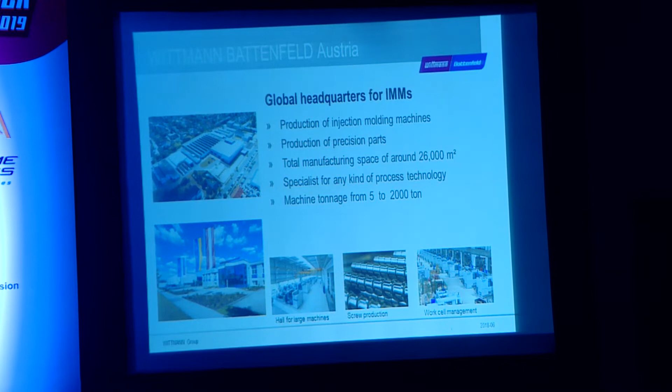Technology and innovation on factory automation. Today, technology is the most wanted for automation, being the most reliable source for high productivity and increasing turnover.

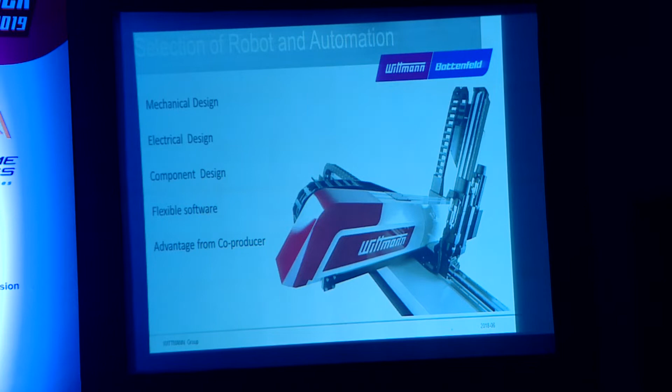The major thing I want to talk about is the selection of robots and automation. What are the critical points we need to consider when selecting robots? The main ones are mechanical design, electrical design, component design, flexibility in software, and the advantage of how it's going to help the co-producers.

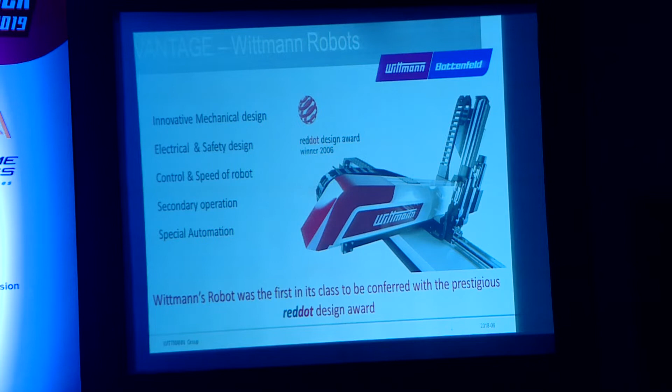So how is it going to help us? Wittmann was the first company to win the Red Dot Design Award for this in 2006, for robot designing, based on the mechanical, electrical, and safety design.

About the mechanical design in general: we have a stable design with a kickback stroke, and the drive is independent of the length, using high dynamic motors and gearboxes. Mainly, we use linear bearings.

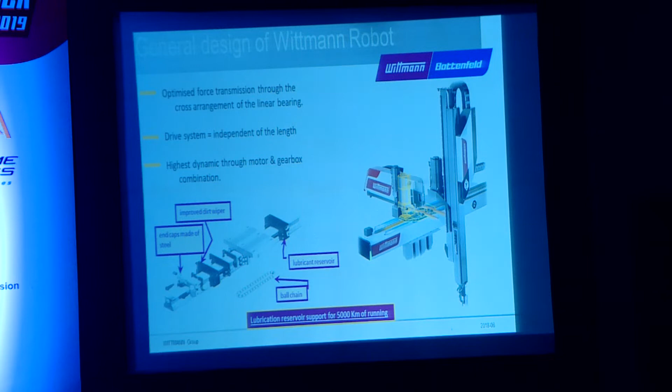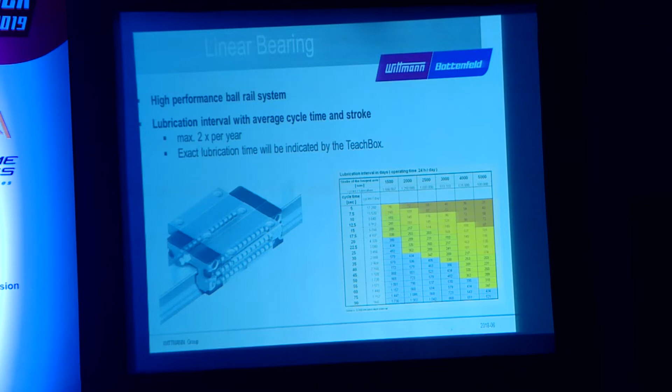All these linear bearings support 5,000 km of running with inbuilt lubrication, which covers almost 1 year of time. As advice, we ask everybody to lubricate these linear bearings every 6 months.

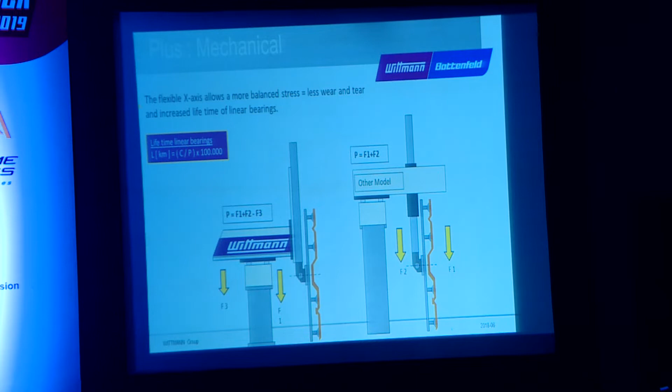Because of the kickback design, we are able to handle long end-of-arm toolings or long components with a short stroke. Due to this, we avoid the cantilever effect, and we have a counterweight on the back side. This helps with a high linear bearing lifetime and mechanical advantages.

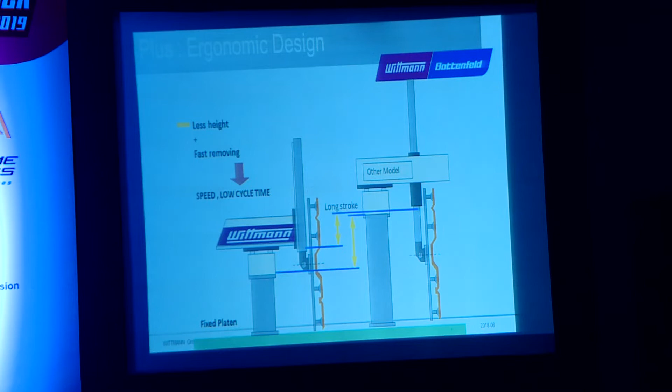Due to this kickback design, the adapter size is low, so we can achieve a low cycle time. Even the cycle time can be reduced with this.

Electrical design: basically, we use CAN bus technology, so all our cords have been divided inside the robot. When you see the electrical cables, there are only very few cables running through the entire robot, since we can control everything with CAN bus.

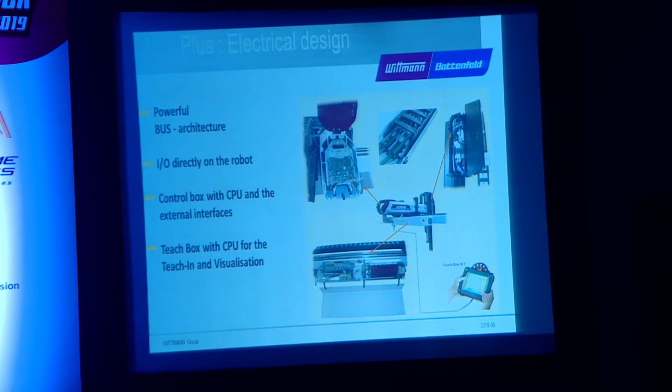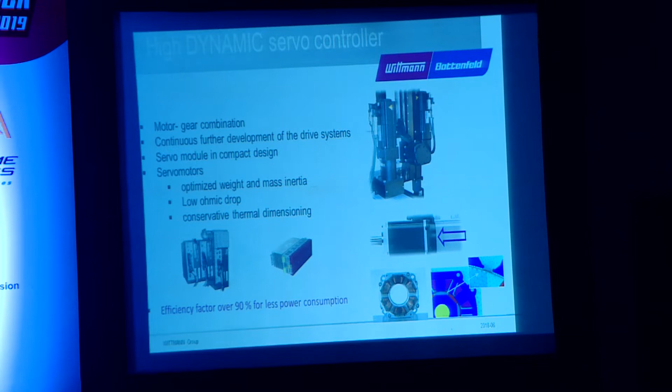High dynamic servo controls: we have been establishing servo control technology for a long time, using 90% efficiency servo drives, with 3 servo drives combined into 1 drive for a power saving mode.

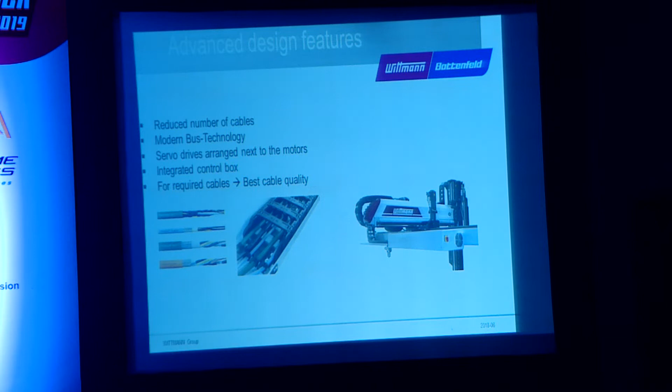As I told you, we have fewer cables. I've shown the cable conduit running in the robot—you can see only 3 or 4 cables running: one is the CAN bus cable, second is the servo cable, third is the power cable, and one pneumatic connection. We use high efficiency cable qualities, which are reduced for long-term running.

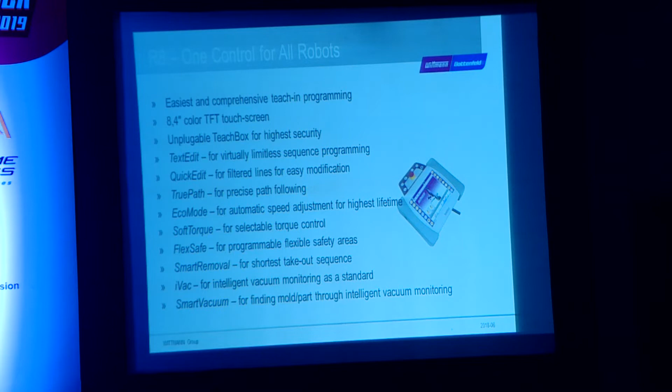The controls have a special feature of touchscreen controllers, which is a removable controller. With this controller, we give many features as standard, like text editing, quick editing, true path, eco mode, soft torque, flexible safety, smart removal, intelligent vacuum, and smart vacuum. These are standard software we, as Wittmann, give to the customer for reducing the cycle time compared to other robots.

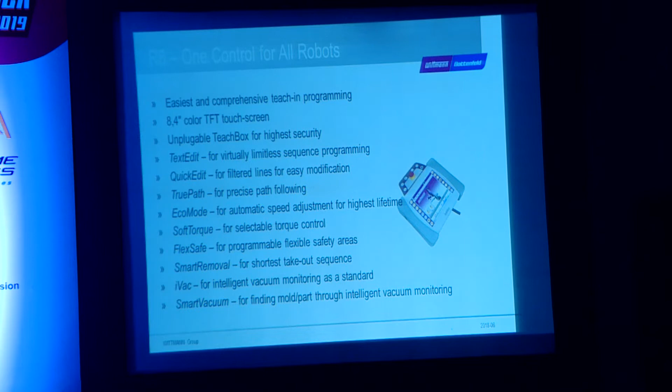How we are going to reduce the cycle time, we will see next: advantages and savings by automation. Basically, when you run the component or injection molding machine with a manual cycle and convert to robot automation, what does the robot do?

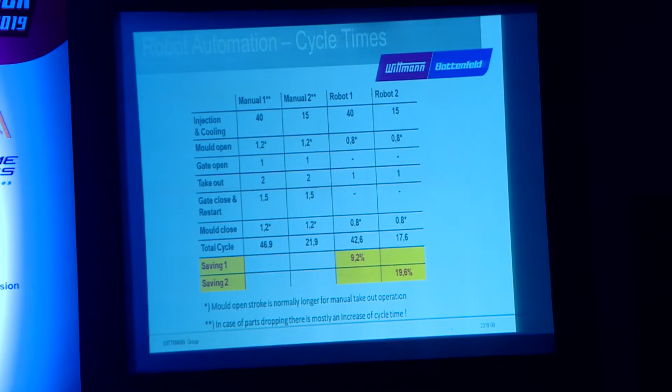You can see there's a 9% to 19% savings in cycle time without touching the injection parameters. Only in mold opening, mold closing, and gate opening can we save 9 to 19% of the cycle time, from manual operation to robot operation.

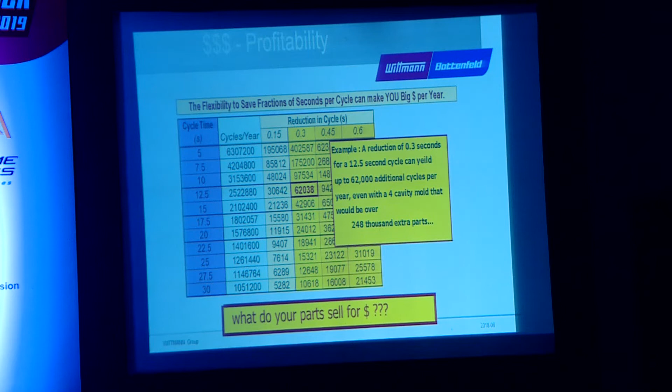With 0.3 seconds of cycle time reduction, we can earn 62,000 shots per year, which is a cost saving for you. From manual to robot operation, with a 4 second cycle time saving from mold opening, closing, gate opening, and operator handling, we can get 40,000 additional components per month. This is just manual operation versus robot operation.

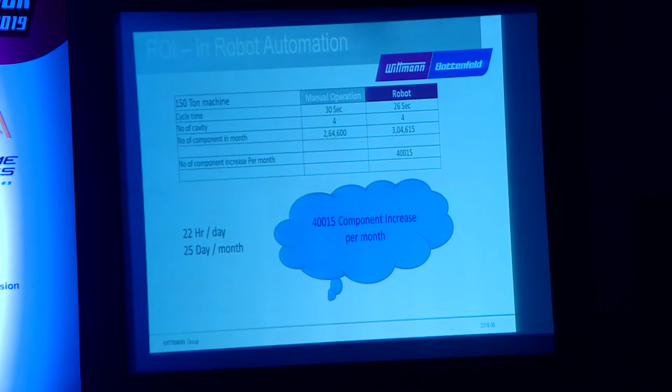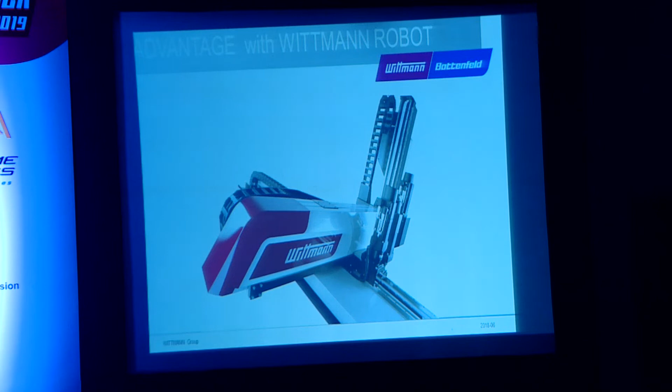What is the advantage of Wittmann over other robot manufacturers? How do we gain more components or energy savings? Do you believe everyone talking about meters per second, or the speed of the robot, is defining it correctly? Everybody says my robot runs at 6 meters per second or 7 meters per second. How is it defined? Which car is the fastest car?

Obviously many people will say Ferrari, or a race car, is the fastest car. But when every car is driving at 100 kilometers, both cars run at 100 kilometers. Neither of the two cars can go there simultaneously, but achieving 100 kilometers is the factor. That means speed doesn't matter - the acceleration speed makes the car more advantageous.

This is a classic example: the car on the left side has achieved 110 kilometers per hour in 11 seconds, and the car on the right side will take only 3 seconds. So in 3 seconds it reaches 110, while this car takes 11 seconds - reaching 100 is the goal.

The result: acceleration is more important than speed, because speed only counts once you reach it, but to reach that speed we need acceleration. The robots are driven in very short strokes, like 1500 to 2000 mm, so we need high acceleration initially to counter this.

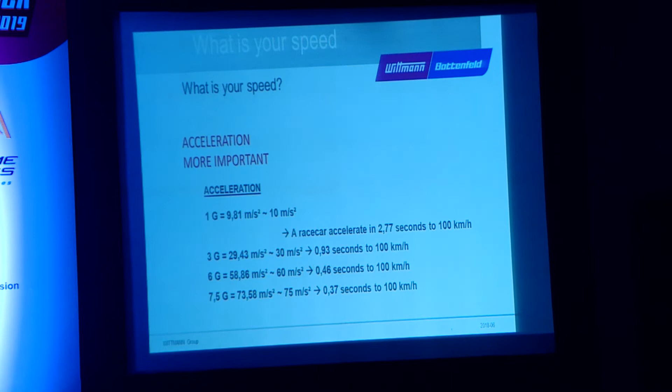How does Wittmann robot compare? As a comparison between our own robots based on the basic model 832, we had the standard model with 2.8 meters per second speed, high speed robot with 3.77 meters per second, and ultra high speed with 5.7 meters per second.

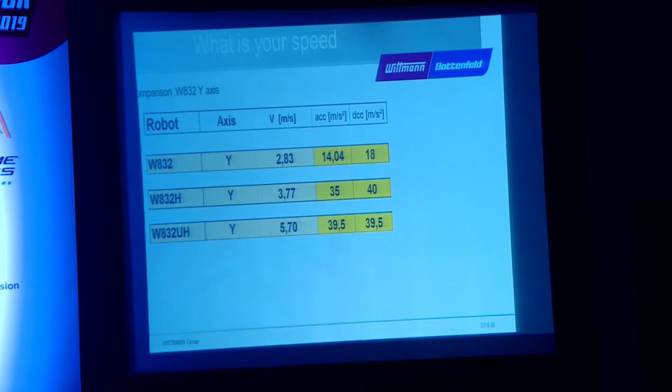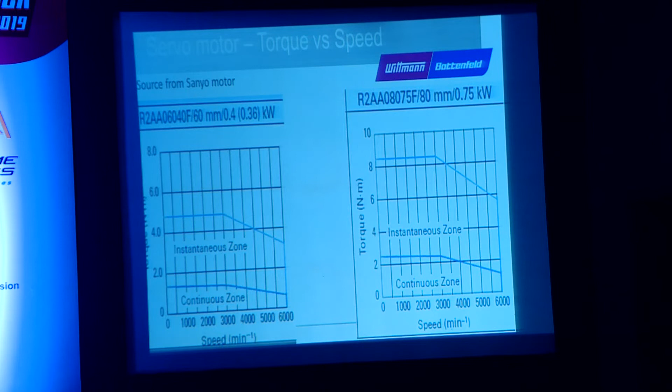To achieve this, you need the right servo motor with the right speed - a comparison between a 400 watt motor and a 750 watt motor. If you look at torque versus speed, many people say you can use a 400 watt motor in place of a 750 watt motor, but it's definitely going to affect the cycle time. When you have the right motor, right selection, and right payload for the speed, you will save cycle time.

This cycle time savings of 0.1 second means you get 5,000 additional components or cycles per year. This is the additional savings that Wittmann gives with high speed acceleration robots.

The control features: we have smart removal, mold synchronizing, intelligent vacuum, quick edit, dynamic drive, networking, and much more, like a safety package, which comes as standard in our robot. So these are mainly standard options in our robots.

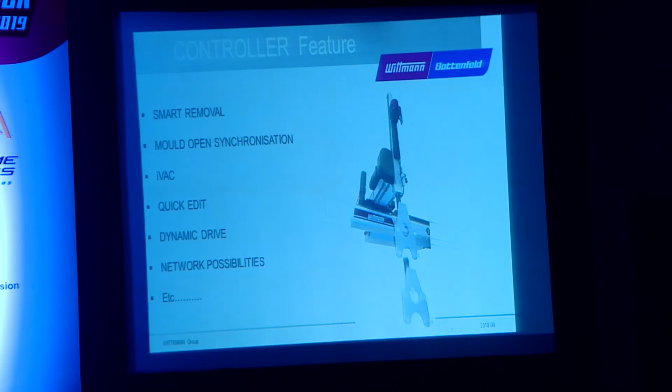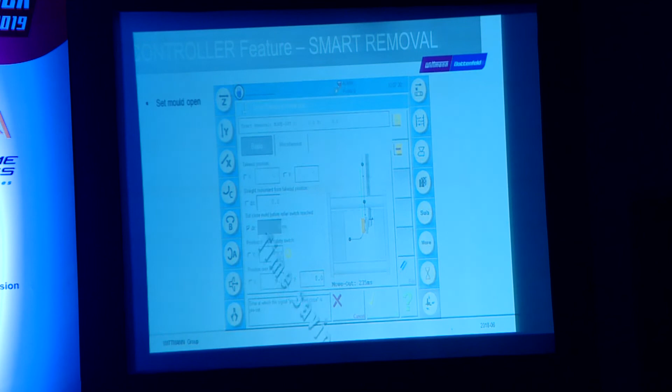The smart removal: how it works is that once you set the mold opening, the robot will recognize the mold opening and mold closing based on the input, and we can start the robot a little bit in advance before the mold open starts, so we can save further cycle time in the robot. Here's how it works - a small video.

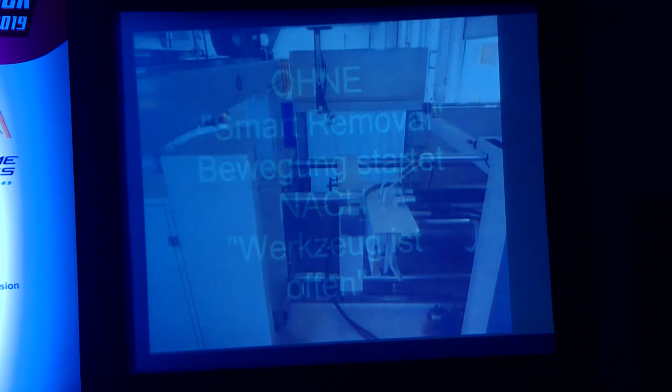So we have set this robot without smart removal - what is the cycle time? You will see it. And with smart removal, what is the cycle time? You will see it.

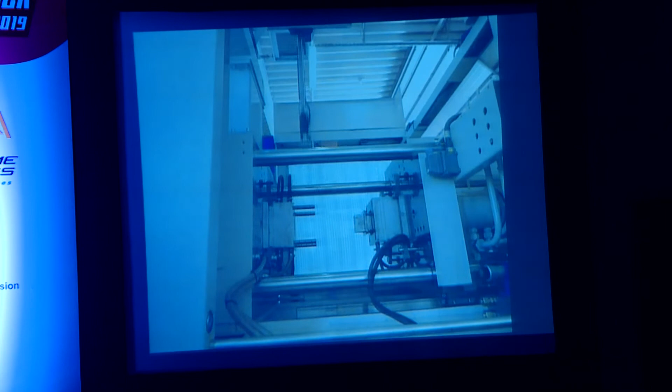Without smart removal, the cycle time of the machine is 28.8 seconds. Now we are operating with smart removal. When you see it at a slow speed, the robot starts before the mold open completes.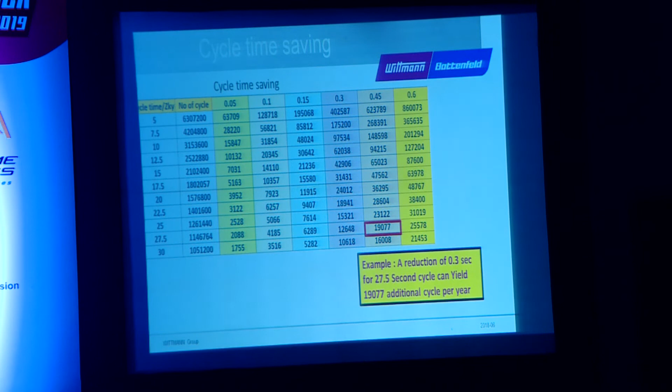We are able to see a cycle time saving of 0.3 seconds with this smart removal function, bringing the cycle time down to 27.5 seconds, which means you get 19,000 additional cycles per year. This is what we calculated for smart removal.

And the energy saving with the eco vacuum - what we have seen is that many people are familiar with digital vacuum. Now we are going with energy saving through eco vacuum and eco mode. This is like running at optimum speed.

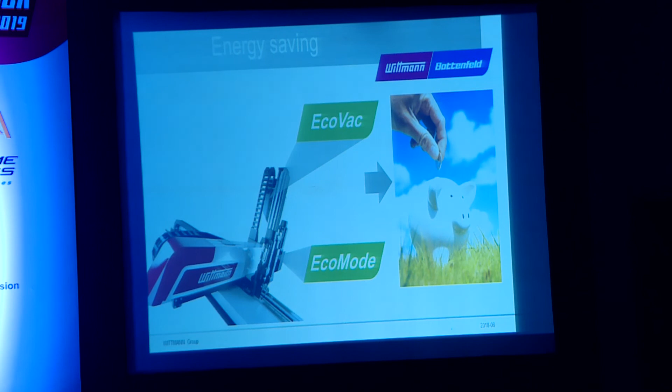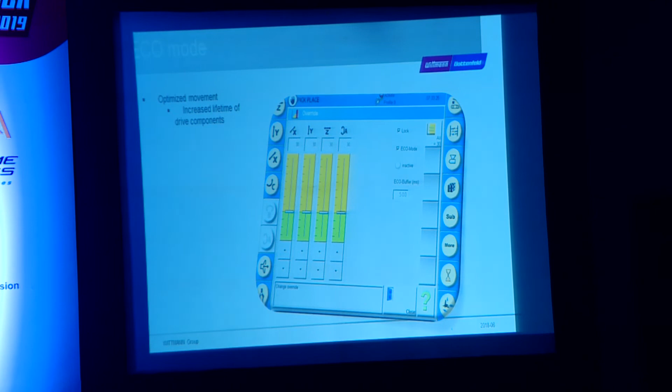The robot will automatically recognize the speed of the machine and optimize the speed of the entire operation outside the machine. With this one button on the right side, you can see the eco mode. With this button, the robot automatically synchronizes with the speed of the machine and gets optimized, giving us power savings of 40% compared to the regular full-speed robot running.

This is a small amount, like 4,300 rupees savings per year, but it is a small amount that takes on more value when these small drops of energy saving are done on the robot side.

With intelligent vacuum, we have shifted from digital vacuum to analog vacuum. Maybe somebody thinks analog is old technology, but analog gives more accuracy than digital technology. You can adjust the vacuum level, and we can monitor the vacuum level.

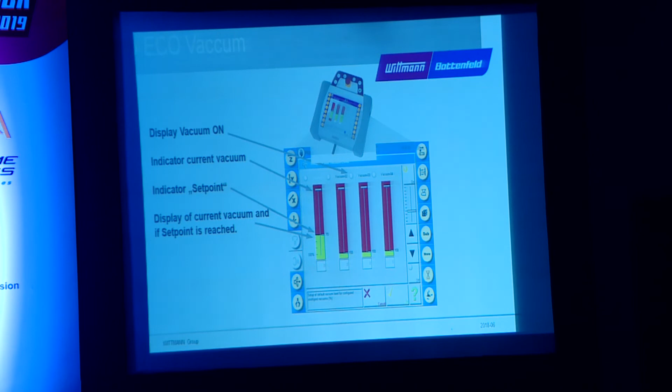Even with this vacuum, we are able to reduce vacuum air consumption, which also does energy saving for the company. With this eco vacuum, we are able to save something like 17,281 rupees per year, which is also a huge saving for the year.

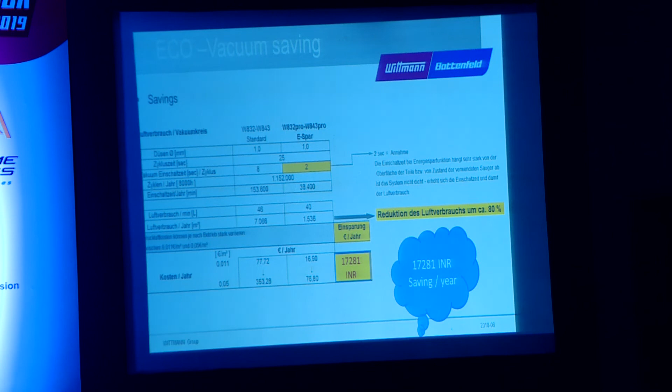Flexible programming and flexible safety programming - we have given this as standard with the Wittmann robot, because normally in India we consider that we don't use safety packages or safety fencing in robot areas. So we built it in-built with the robot, so human safety is taken care of in the robot.

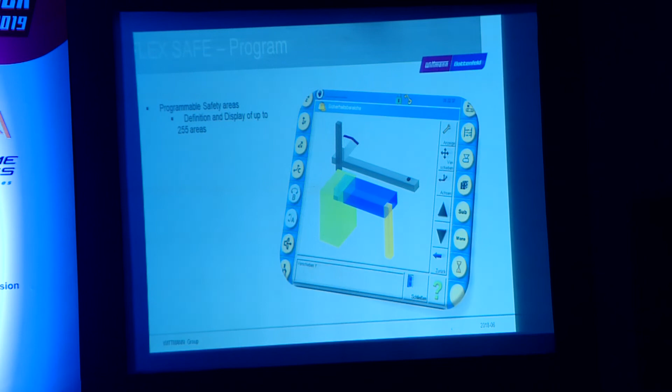Dynamic drive is a standard feature available in the high-speed robots. If you change the end of arm tooling, the robot will recognize the weight torque of the motor, and it will automatically adjust the torque, and the acceleration can be increased.

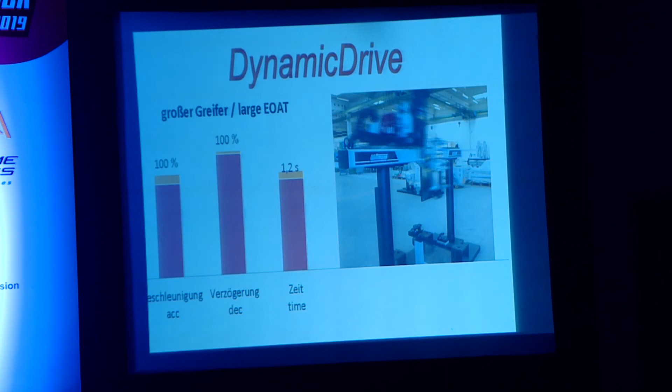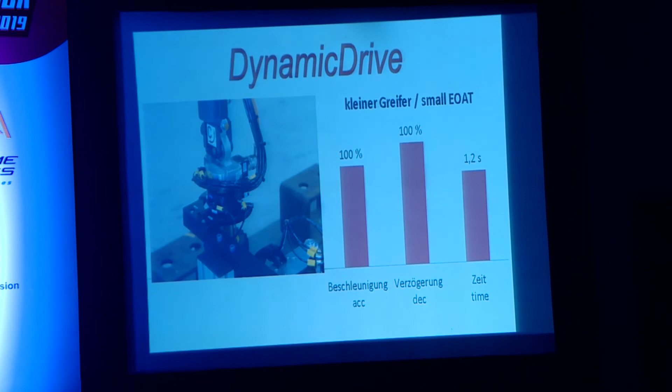We checked this for bigger end of arm tooling, bigger parts, as well as smaller part tooling, so you can see the difference in acceleration speeds. With this, we can also increase the lifetime of the servo motors.

Here you can see that above 100%, the acceleration speed has been reduced to maintain the same acceleration speed of 7.5 G. With this, the acceleration can still be achieved, but the lifetime of the motor can be extended.

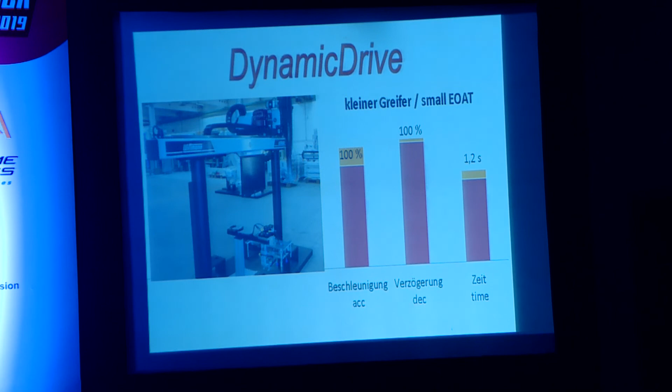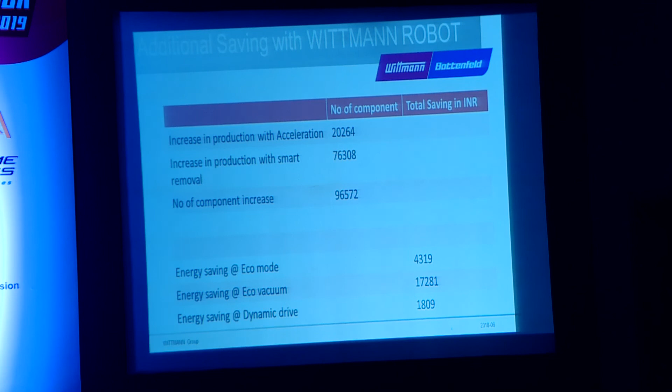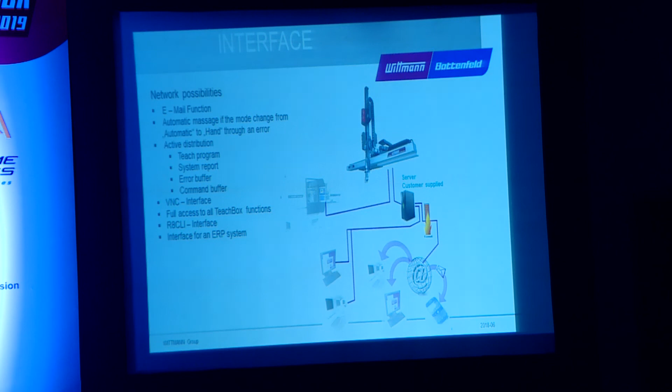The Wittmann robot can interface with all networks and ERP systems, and VNC license. VNC can be integrated, and this can be integrated with machines for Industry 4.0, and we also provide an interface with a mobile app.

This mobile app is available on iOS and Android, free of cost, so you can download it and integrate it with the Wittmann robot. We can see the cycle time of the robot, the mold opening time, and which product it is running, so we can have this information on your mobile phone.

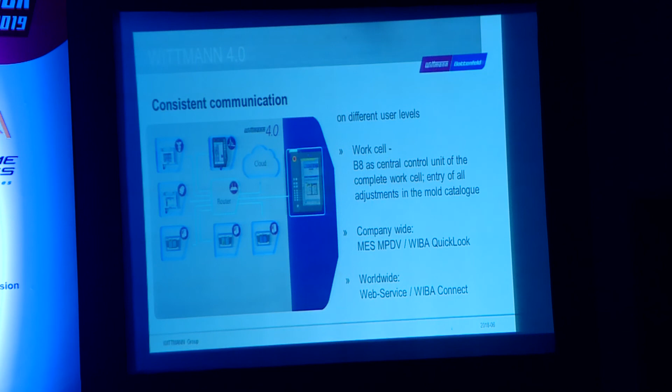All our Wittmann equipment is integrated with the latest Industrial 4.0 technology, so we can have web service, WIBA Connect, or QuickLook integration with the equipment.

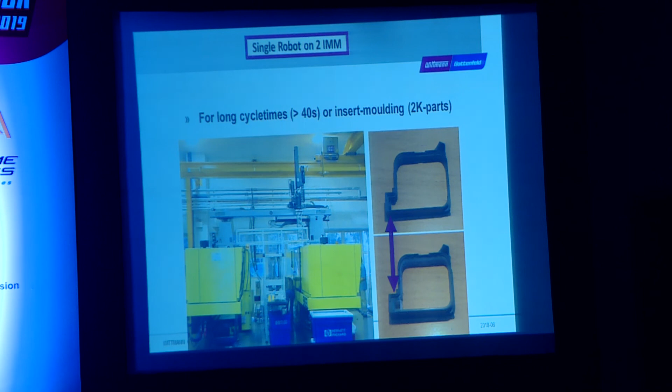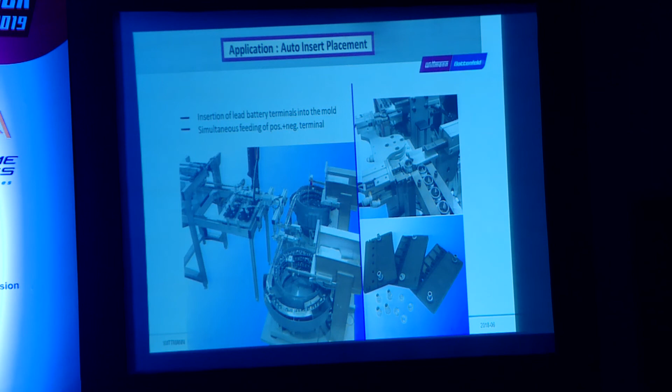A few examples for automotive products: we can handle one robot across two machines for two-color moldings, automation with insert placing for applications like auto inserting with bowl feeding technologies, multiple inserts handling, bumper fascias, trimming, textile insertions, foil insertions, and palletizing - all can be done in the standard software programming of Wittmann Group.